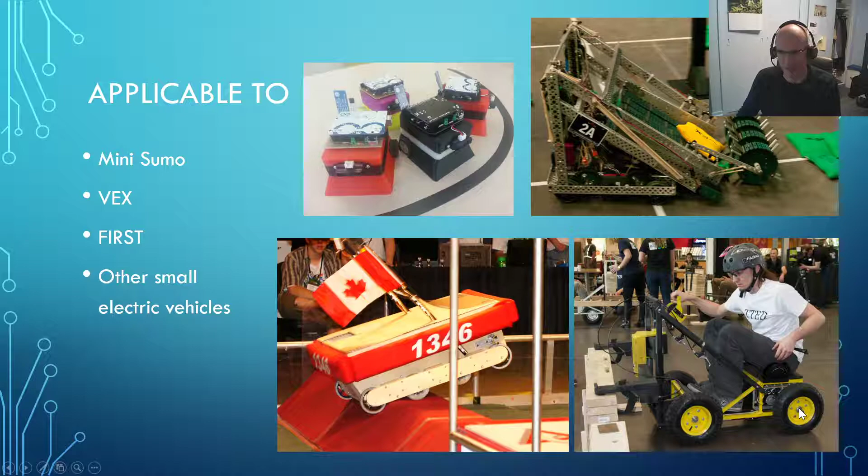In the process here in particular, you'll see that this is a four-wheel drive design with high traction wheels. It looks really good, but there are some real challenges when you go with four-wheel drive. So we'll talk about that as we go on through the design, because there are a few tricks that, if you haven't designed a robot drivetrain before, can end up catching you up.

So let's talk a little bit about some of the physics that goes into this. If you understand everything from first principles, then you're going to understand why some of those designs work really well and other ones have some challenges.

Here is just a simplified side view of a mini sumo robot. A lot of our robots, especially at the simple end of things, will just have two wheels contacting the ground and one motor driving each wheel. You can see we've got a design here called the BoomBot, and on each side I've got one motor, and then we've got a slidey platform up at the front.

This is what the mini sumos tend to do - because you're trying to push somebody off the ring, you want your plow to get right down underneath them. So the front of your robot will form this wedge, and you want a little bit of weight resting on the plow, but not too much, because all of your pushing power is going to be transferred through your axle down through your wheel.

We're going to talk about the coefficient of friction happening right here where the wheel meets the road - literally where the rubber meets the road. Really important in analyzing where this goes is your center of gravity, or center of mass, on your robot. You can adjust that when you design your robot by controlling the position of your wheel relative to the plow.

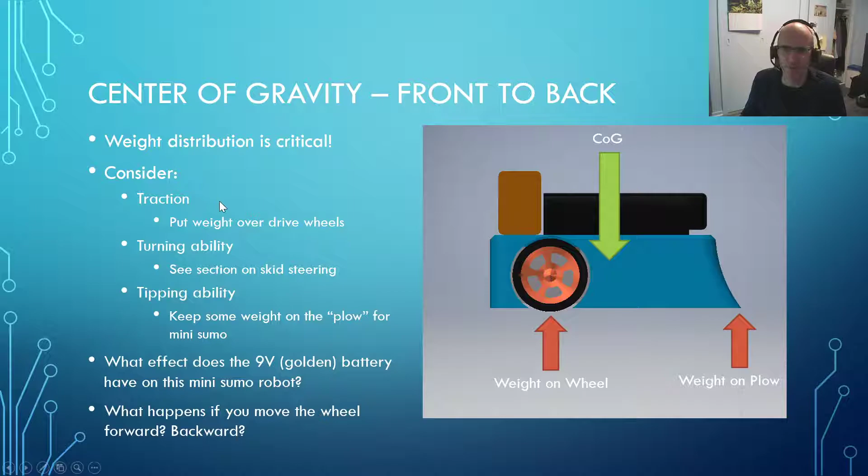Those are calculations that we did in our structures or statics class in a previous semester. So take a look at your moment calculations and how those work, because they really matter here as well.

Now, in addition to the center of gravity being forwards and backwards, as you get into bigger vehicles you also need to think about your vertical center of gravity. Although this robot's great, it's got almost all of the mass horizontally aligned right over top of the drive wheels at the back.

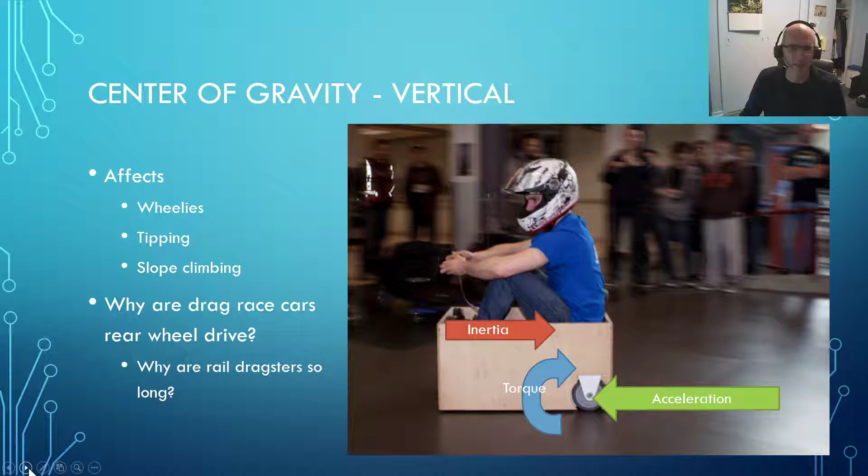Here we were able to fly out to Toronto and take part in a competition at Hershey Center in Mississauga. This would have been back about 2005, 2006, I think, and here we are in the FIRST Robotics competition.

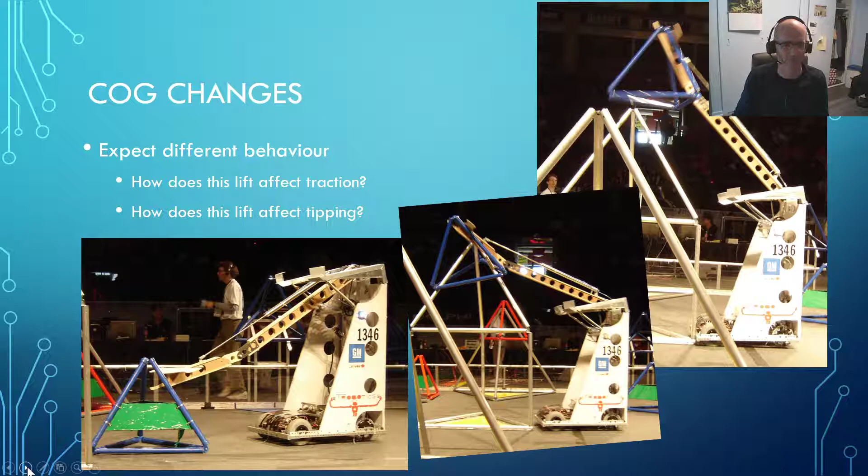So let's come back to first principles, sort of physics 11 type of things. Here we've got traction. Where does our traction come from? I'm defining traction as your pushing force—higher traction means you can push something harder. This is important if you're designing a mini sumo robot, because you want to push someone pretty hard out of there. It also affects your acceleration. If you want a high performing robot, you need a lot of traction so you can accelerate and change your speed.

Now this comes through friction of your wheel with the ground. There's what we call the normal force. Normal in this sense doesn't mean in comparison to unusual—it just means normal as in perpendicular. You could call it F perpendicular if you wanted, perpendicular to the surface you're on. In fact, it is also the force of gravity in this situation—only when you move onto a sloped incline does it stop being just gravity, and you have to get more complex in your calculations.

What happens is that your normal force interacts right down here where the rubber meets the road, where the tire meets whatever surface you're driving on. That interaction results in something we call the coefficient of friction. And just as secret engineering code, to keep people who haven't sat through boring lectures from understanding what's going on, instead of calling it the coefficient of friction, they've given it a nice little Greek symbol: mu.

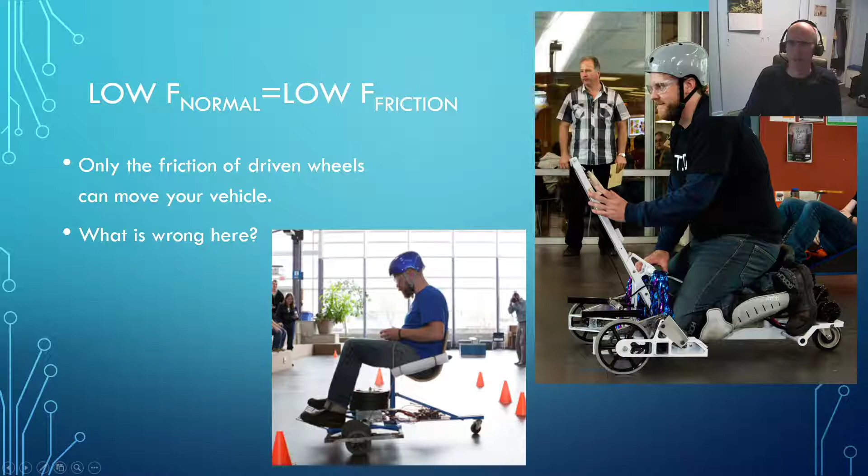This comes to one of the benefits of all-wheel drive, and a good comparison for people who've grown up in northern BC, particularly those who've had two-wheel drive pickups, is they'll appreciate the challenge of putting the mass over top of the drive wheels. In a two-wheel drive pickup in the wintertime, you'll typically throw sandbags into the back to weigh down the rear, because you want to get the mass of the vehicle over top of those wheels to increase their interaction with the snow and the ice. A better option is to go with four-wheel drive or all-wheel drive, because now all of your driving surfaces in contact with the ground are helping to propel the vehicle forward.

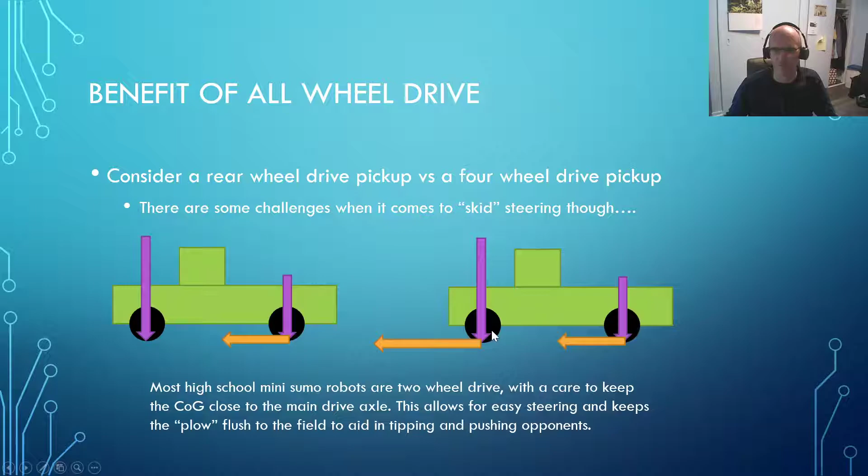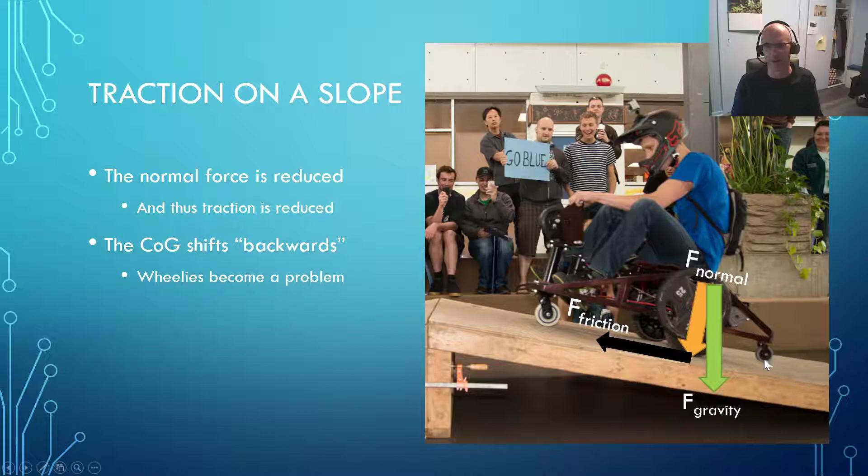They did make it up the hill, and it came out okay.

So we've got these calculations right here, and they also introduce constraints. When you know what your constraints are, then you can design within those constraints. So we've got this really simple formula: the force of friction is the coefficient of friction multiplied by our normal force.

We know that force equals mass times acceleration. F normal is based on the mass of your robot and the force of gravity. So you can make the robot heavier, you can shift where the center of gravity is, you can play with those things, but you're not going to be able to change the force of gravity at Earth's surface—because if you had that kind of power, dealing with classroom discipline probably won't be an issue for you.

Your maximum pushing force, therefore, is limited by the coefficient of friction between your tires and the road. In fact, your maximum acceleration in G-force is the coefficient of friction between your tires and the road, which is interesting, particularly when you're looking at dragsters and vehicle design. All of your acceleration is built around how well you can get that traction, the force from your drive axle down onto the road.

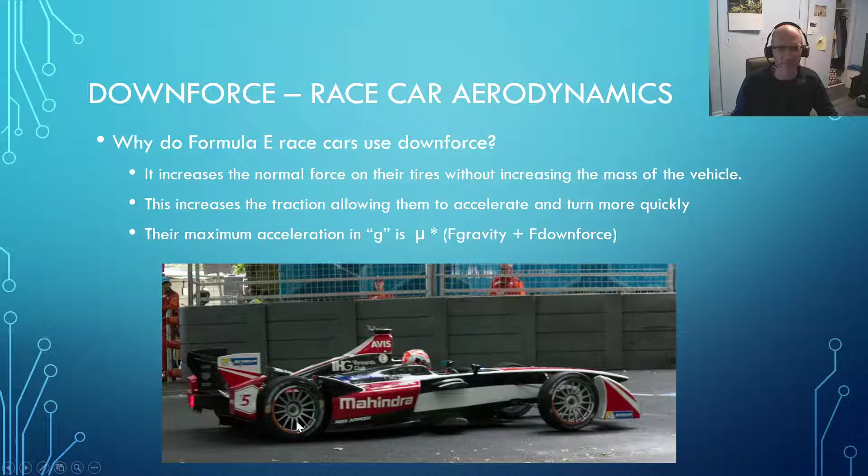In Physics 11, the physics teachers tell the students that the area of contact does not matter when calculating friction. Now, clearly, if that were true, these race cars would have much smaller wheels on them—because why not? They'd be smaller, lighter, and more aerodynamic.

We know race cars have big wheels, so people say their physics teacher told them that surface area doesn't matter. The only thing that matters for friction is normal force and coefficient of friction, and that tells you what your frictional force can be. Okay, it's a good model.

But there's various things going on at the micro level of interaction between the tire and the road. First of all, the road is not perfectly smooth. You've got little deviations in there, so your tire can press down into those deviations depending on how soft or sticky the tire is.

The other thing that happens is as the tire starts to accelerate or go through corners, you get shearing forces. If the tire was very small, all of the force of cornering would have to come up through a very small area of the tire, and you might start to shear off some of the rubber.

You can see that happen on race cars when they literally lay rubber on the road — that means they've exceeded the shearing force of the rubber. By having more rubber on the road, there's more surface area to apply that force across, so you're less likely to skid out and burn rubber, and more likely to follow the path you want or accelerate.

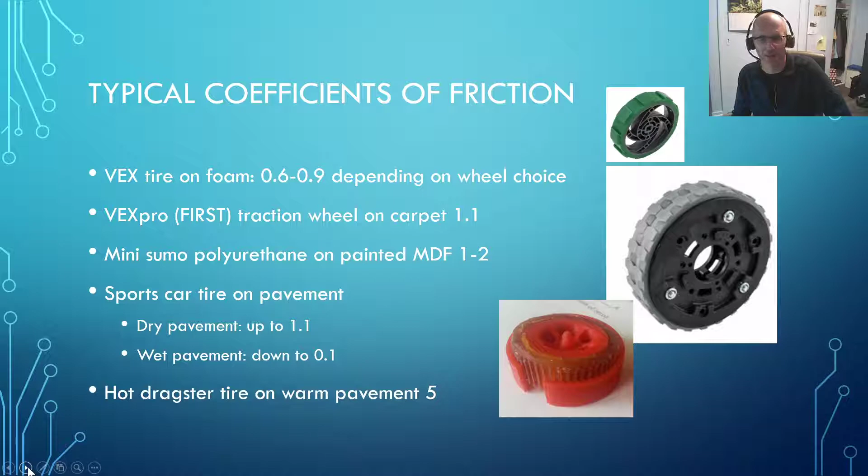So we come in here and say, well, 500 grams, that's 5 newtons in Earth's gravitational field. We've got 80% of that mass over top of the rear wheels, and you can tell that by putting one scale under the plow and one scale under the wheels — one should read 400 grams and one should read 100 grams. So you've got 5 newtons, 80% of it over the rear wheels, the drive wheels.

That's 4 newtons of normal force acting on the tire, and with those 4 newtons pressing down, a coefficient of friction of 0.9 means you should be able to push that robot forward with 3.6 newtons of force. So if you were in a pushing battle with somebody whose robot had 85% of its weight on the drive wheels...

They would have a higher normal force. And if they had the same wheels on the same surface with the same coefficient of friction, they should be able to push you backwards because they would have more than 3.6 newtons of pushing force.

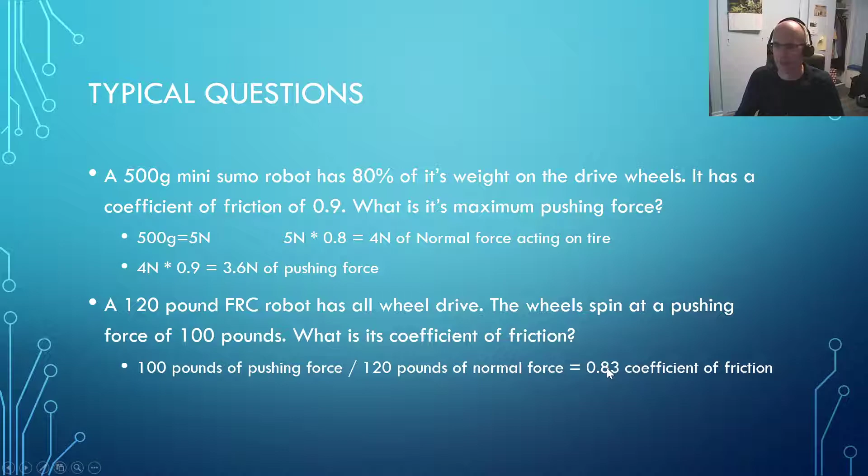You say, well, I've got 100 pounds of pushing, or in this case pulling, force. That gives us 100 pounds versus 120 pounds of normal force. So we've got a 0.83 coefficient of friction before those wheels start to spin.

Now, when you're pushing or pulling, friction is really good. When you're accelerating, friction is great — that's what you want. But we said we're going to talk about some of the problems with four-wheel drive designs, and this is one that in our first year of FIRST Robotics came back and caught us really well.

I understood the physics, but I'd never built a robot that size before. I'll tell you a little bit more about that. We solved the problem with some help from other teams, but we weren't able to turn because we did a four-wheel drive skid steer robot.

If you've got really good forwards and backwards traction, that's great. But if you've got really good side-to-side traction, you're going to be stuck, because your forwards and backwards traction trying to turn the robot this way will be fighting against your resistance to the lateral forces.

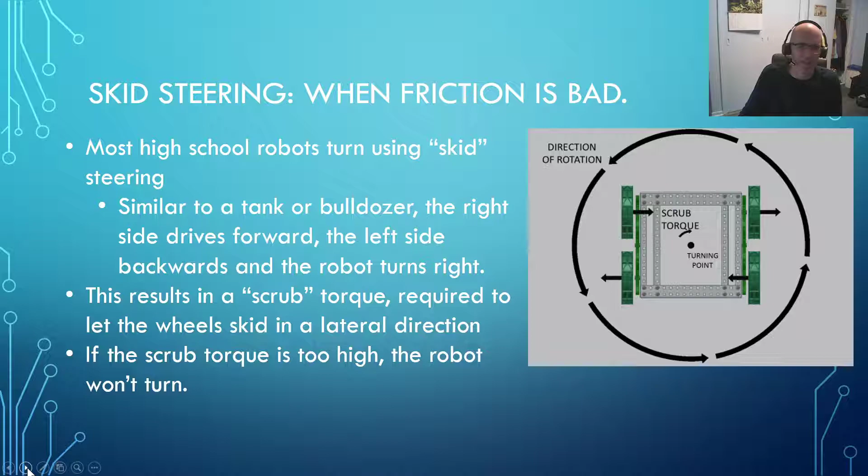So we'll take a look at some of the things you can put into your design to overcome that, because as we learned over the years, those problems got solved.

Here are some skid steer solutions we've used in a number of different places. With our tethered robots, we'll completely ignore the problem: we'll have two drive wheels, and then just a contact patch here with a very low coefficient of friction because it's just a little slider that fits right in there. So it's got no forwards and back, minimal forwards and backwards, and minimal side to side friction - that's going to slide very nicely from side to side.

Right in here, we've got the boom bot - my head's kind of sitting over top of the wheels here, but we're also going to make a boom bot. Down here, we've got our line following sensors, and again, they are going to be in a low friction skid platform. That's only there to keep the robot from tipping over forwards and backwards and to follow the lines. It's got very little interference with turning side to side, so very little scrub torque.

Here's a vehicle that we made for the Vehicle in a Box contest, and you can see it's got casters on here. So when this wheel turns forward and the one on that side turns backwards, it generates a turning torque right here, and the casters will turn and allow the front of the robot to skid.

Yeah, that works as well. Casters are probably the most inexpensive option to solving this problem. Putting a skid surface down here wouldn't work that well, we'd scratch up the floor something horrifically. So we needed something wheeled to solve the problem, and casters are readily available, either from a place like Casterland or from recycling old office chairs or furniture.

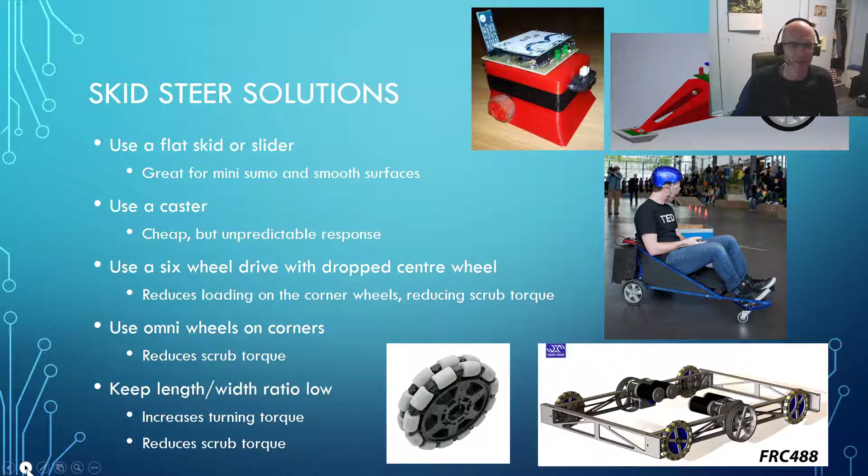Now, getting back to some calculations, we're going to take a look at the moment about the drive axle. What do I mean by that? Everything in your robot is going to be controlled by spinning an axle. So the torque about the drive axle is simply the force acting at the edge of the tire multiplied by the radius of the tire.

So this torque right in here in purple, or the moment if you prefer, is going to be 5 newtons multiplied by 15 millimeters, or 75 newton millimeters. Keep in mind newton millimeters, you'll sometimes see that represented as millinewton meters. Doesn't really matter where you put the milli. Either way, it comes out to 0.075 newton meters because milli is 3 decimal places. So 1 decimal place, 2 decimal places, 3 decimal places. There's our 75 millinewton meters, the same as 0.075 newton meters.

Excuse me, I hope I managed to get mute turned on before.

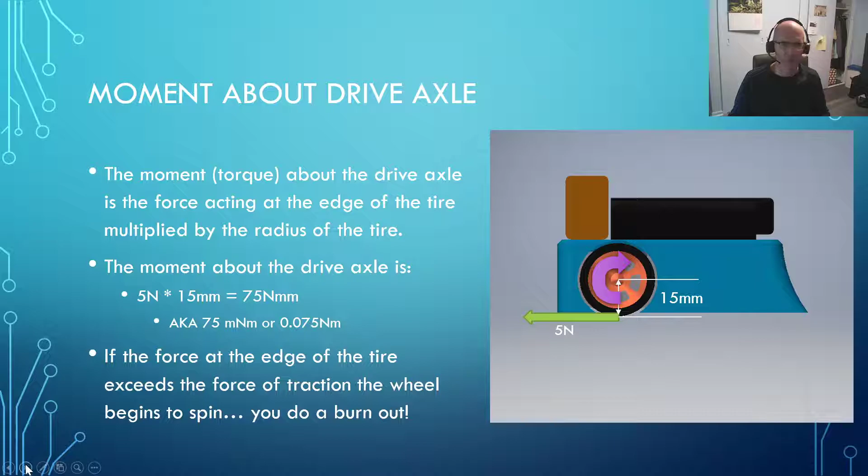Okay, now if the force at the edge of this wheel exceeds the force of traction, the wheel begins to spin and you do a burnout. Generally, we're going to come up with two situations here. One is where the wheel breaks free and you do a burnout. The other is where the coefficient of friction is high enough that you don't have enough torque in your axle coming from your motors, and you end up stalling the motors. So we can either stall or spin depending on the amount of torque we're getting from our motor and gearbox. We're going to take a look at how to optimize that in a bit.

Now, your tire or wheel diameter really matters here. As you increase the wheel diameter, you increase this lever arm, and that increases the amount of torque required to turn this wheel. So with a small diameter wheel, or small radius, we're using the radius as the lever arm. 5 newtons at this point of pushing force, times 15, gave us 75 millinewton meters.

But if we go with a larger diameter wheel, with a 30 millimeter radius, that's going to require 150 Newton millimeters to turn this wheel to get 5 newtons down here. So if these two robots are in a pushing battle, this one is only going to need half of the force, coming from half of the torque at the axle from the motors and gearbox.

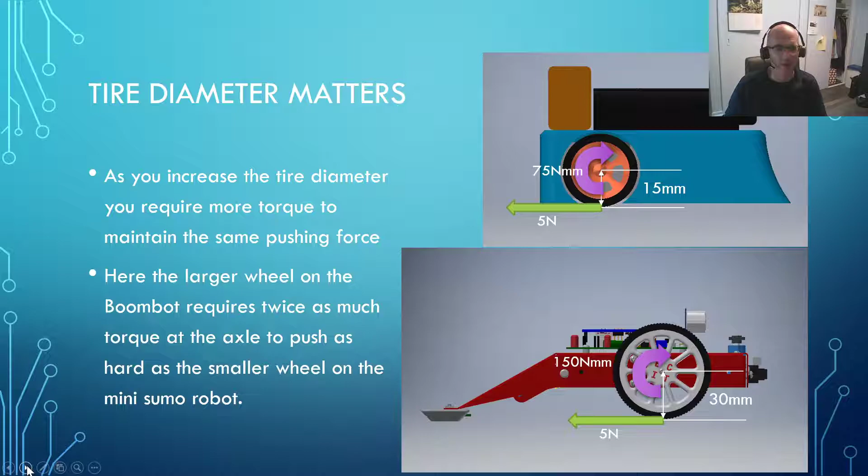The advantage of the larger wheel is that when this axle and this axle spin at the same RPM, this robot will travel twice as fast. If this robot's spinning at 100 RPM, you've got 100 circumferences of this wheel every minute. With this one spinning at 100 RPM, you'd only have 100 circumferences of this wheel every minute, and this wheel has half the circumference because it's got half the radius. So your wheel diameter really does make a difference.

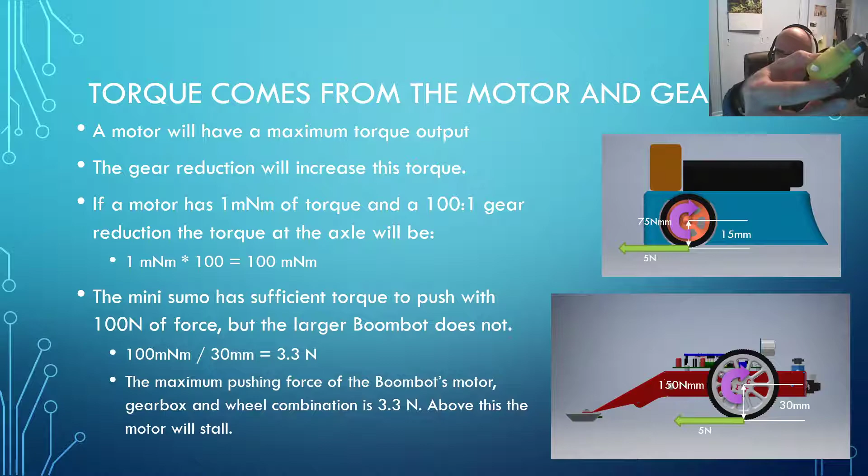Now, our torque to spin that wheel has to come from somewhere - it comes from our motors and our gears. We've got a video where we talk about motors and their maximum output torque. Generally what we want to do is take a small motor like this one, and run it through this yellow gearbox to increase the amount of torque and drop the RPM so that we can spin a larger diameter wheel. Because if we just hooked this wheel directly up to the motor, the motor wouldn't have enough torque to turn the wheel, and it would just sit there continuously stalled.

So, for instance, if a motor has 1 millinewton meter of torque and a 100 to 1 gear reduction, then the torque at the axle would be 1 millinewton meter times the 100-fold gear reduction, which gives us 100 millinewton meters at the axle. Now that would be enough to turn this wheel, because we calculated that this wheel, to get 5 newtons of pushing force, would only need 75 Newton millimeters. This one would require 150 Newton millimeters.

So this particular gearbox with a 1 millinewton meter motor and a 100 to 1 reduction would be able to make this robot push with 5 newtons of force, but would not be able to make this robot push with 5 newtons of force. On the other hand, this robot down here would move faster, because your RPM is also being reduced 100 to 1 - that's where you're getting the extra torque from.

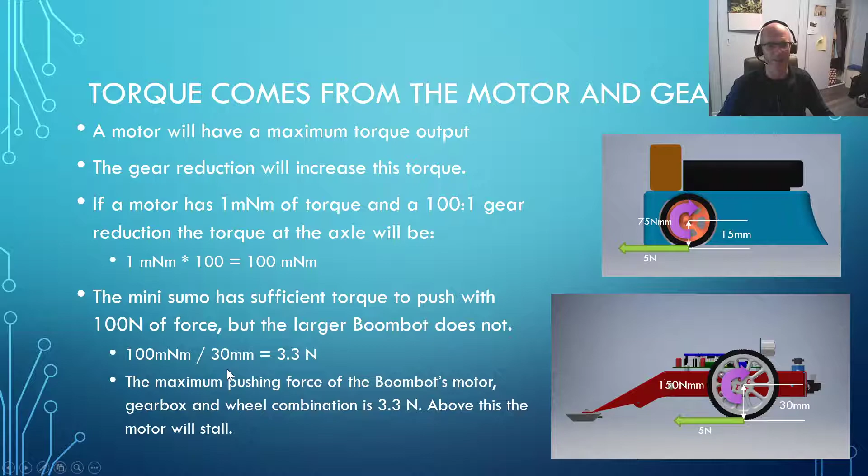Now, when we look at it from the side and do all our calculations coming from one side, we forget sometimes that there's two motors acting here. So really we can divide by 2, or multiply the motor force by 2, to do the overall calculations.

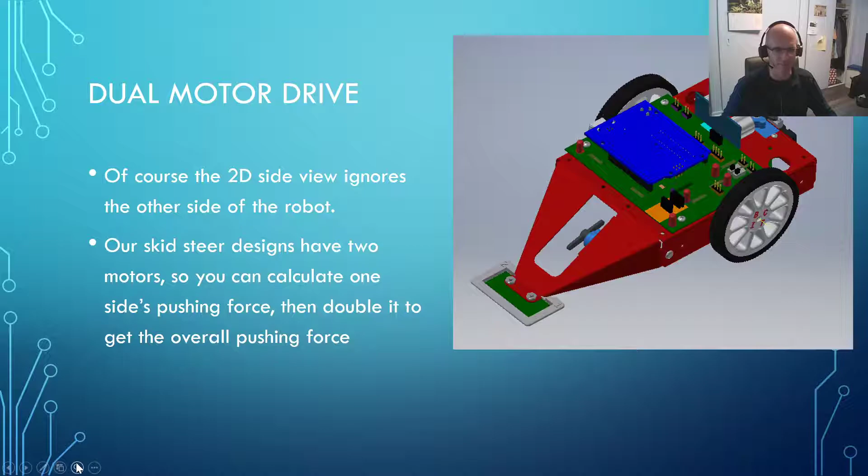So here's an example of a typical question you'd find if you're trying to design a robot. I'm going to use an FRC robot, but this applies to putting an electric drivetrain underneath a La-Z-Boy chair - because why not? If you want to do hallway patrol or run something down to the office, why not put a little robot like this underneath the chair and have it scoot you down to the office? This applies if you're making mini sumo robots, something mid-range like the Boombot, or designing VEX robots. This is an FRC robot, but the calculations are common to all of them - you just sub in different motors, different gear reductions, and different wheel diameters.

The math is all the same. So we're using 2 CIM motors on each side. On this robot, we've got 2 motors driving a gearbox right here and 2 motors driving a gearbox right over here. Each gearbox has a 14 to 1 gear reduction.

The CIM motor has a stall torque of 2.42 Newton meters. In other words, when you apply 12 volts to that motor, it's going to turn the motor shaft with a maximum of 2.42 Newton meters of torque.

You've got an all-wheel drive drivetrain right here, so the entire mass of the robot is coming into the ground, and you have 15 centimeter diameter wheels. What's the maximum pushing force that your motors can achieve? How hard can you push?

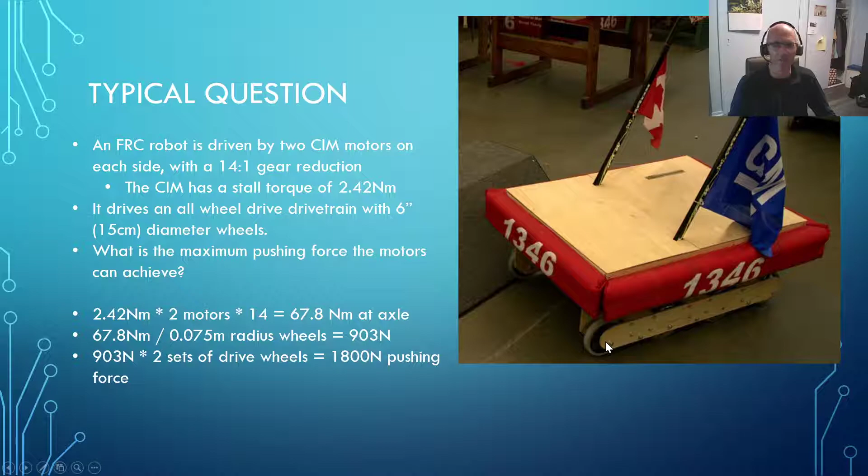You could change that gear reduction. So if this is way too much force, you could go to a lower gear reduction and maybe get a robot that moves faster. Or you could go to a larger diameter wheel and get a robot that can't push quite as hard but moves a little bit faster.

So then we'll hit that with a follow-up question and say, if the robot has a mass of 60 kilograms and a coefficient of friction of 1.1 between the wheels and the playing field, do the wheels spin or does the motor stall when you're turning that motor at maximum torque? Okay, so what we can do is we can say, well, 60 kilograms times 10 newtons per kilogram means that the entire mass of the robot has a normal force of 600 newtons.

Our 600 newtons normal force multiplied by the coefficient of friction of 1.1 results in an absolute maximum pushing force of 660 newtons. Well, we just did a calculation saying that our motors could achieve a pushing force of 1,800 newtons. But when that goes down through the wheels, our traction limit is 660 newtons.

So what's going to happen under this situation is that your wheels will spin, break free, and sit there and burn rubber before those motors stall.

So really, you could make this machine a little faster. You could make bigger wheels. You could go to lower gear reduction. But as you'll see when we take a look at the motor power curve, sometimes that's a really nice way to have it because that means that during normal driving operations, your motors are operating in a more efficient RPM range.

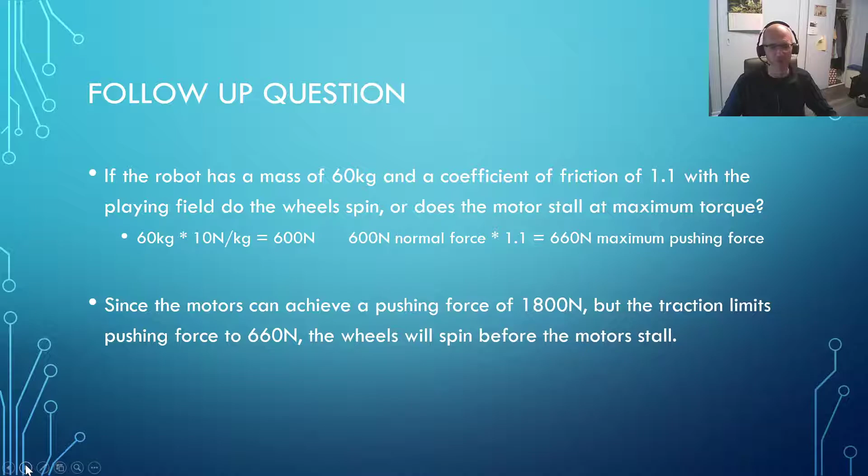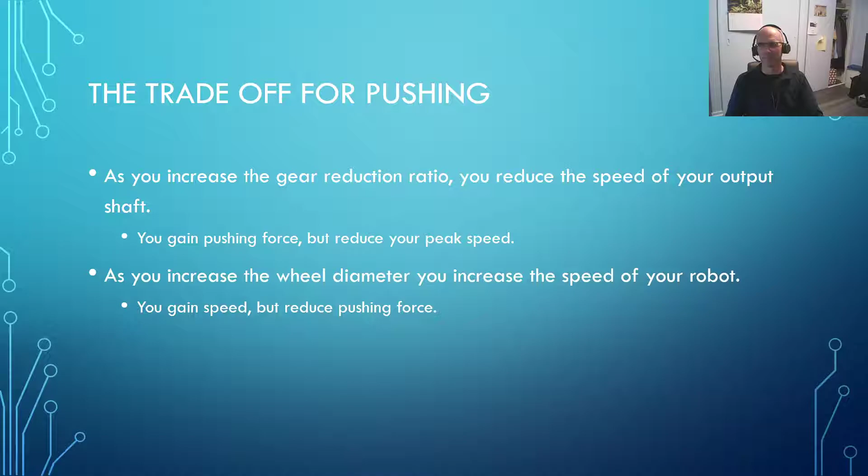So as you want to get more pushing force out of your robot, and as you increase that gear reduction ratio, you reduce the speed of your output shaft. It lets you turn that output shaft harder, but you reduce your peak speed. Now the trade-off at the other end is as you increase your wheel diameter, you increase the speed of your robot, gaining speed but reducing the maximum pushing force that your motors can generate.

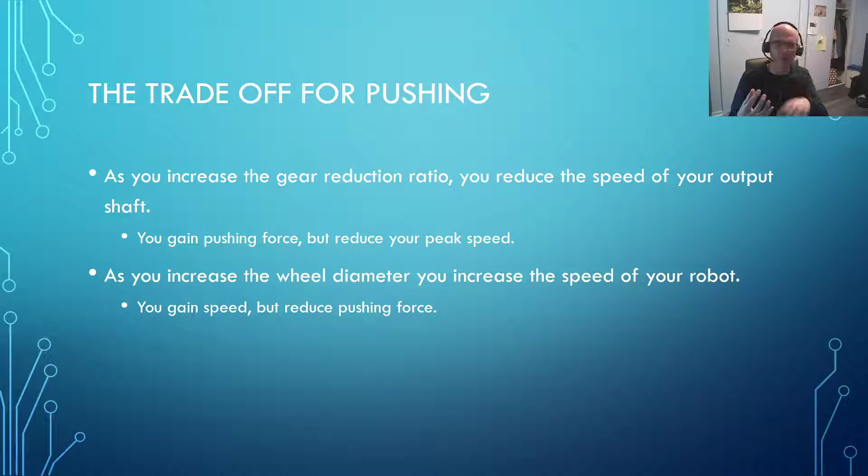So when you're designing your robot, you're going to have to do some calculations and figure out how big a wheel do you want, and based on the size of the wheel and how hard you want that robot to be able to push, you need to then take that back and figure out your gear ratios based on the performance characteristics of your motor.

So here's one to take a look at your Tethered Mini Sumo robots, because this affects your speed calculations as well. Your Tethered Mini Sumo robot achieves a maximum motor power output at a speed of 6,113 RPM. And again, there's another presentation that looks at motor power curves that will talk about that.

Typically, we might have a 1-inch, 25-millimeter diameter wheel on a Tethered Mini Sumo robot, and one of the gear reduction options you can build into a Tamiya gearbox is 114.7 to 1. There's a handout called Mini Sumo Design Tips that discusses different gear ratios and suggests wheel diameters to try, walking you through these calculations step by step.

So what is the peak velocity of your robot going to be under this setting? If you're achieving peak velocity at peak power, you take your 6,113 RPM - that's your little motor spinning at about 6,000 RPM - and divide that by 114.7, your gear reduction ratio. That means your axle shaft should be turning at 53.3 RPM.

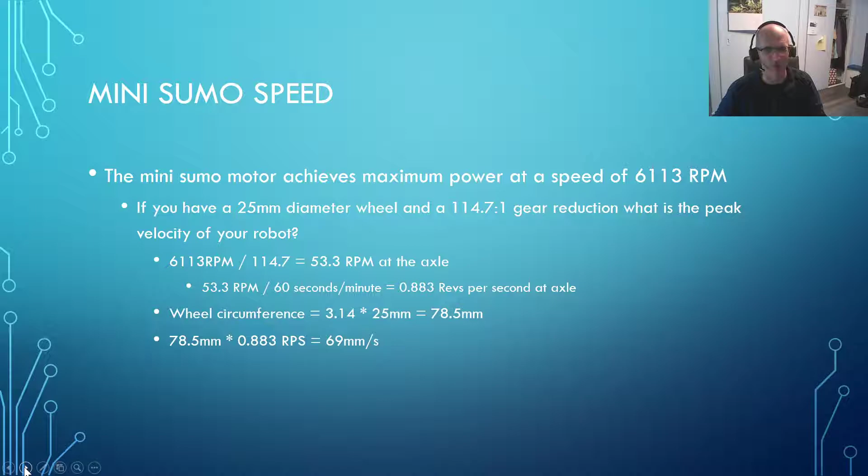For a tethered mini sumo, that's just about right. As I say in the handout on tethered mini sumo design tips, sometimes you can actually build one that moves too fast and is difficult to control, let alone not having much pushing power. You do need to be able to control these robots, and sometimes one of the reasons we gear the motors down is just to make them more controllable.

Now, this is applicable to robots, and we're discussing it in the context of mini sumo robots - these little things you can hold in your hand. But really they apply anywhere you're using any kind of motor to build any kind of vehicle. One of the first projects I did when I started teaching high school, fresh out of BCIT, was we made Electrathon race cars.

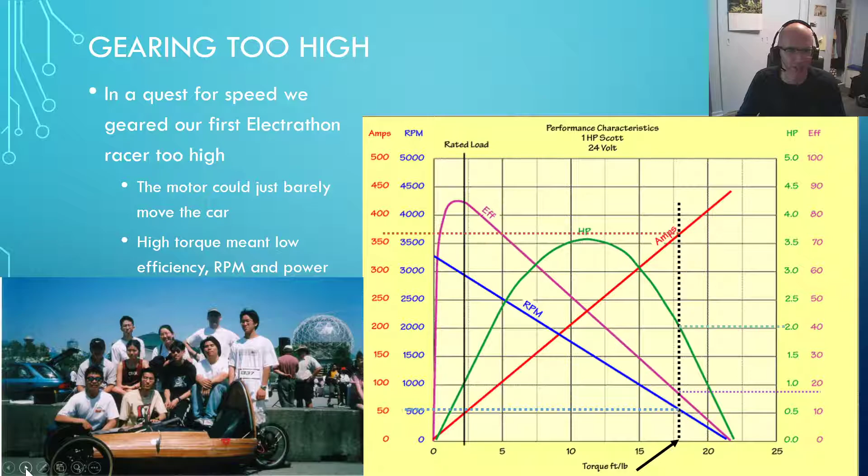Although this wasn't the fastest Electrathon car on the track, it was top 2 or top 3 in BC that year. It was definitely the most maneuverable, and if there'd been a slalom competition, I'm pretty sure this one would have ended up winning.

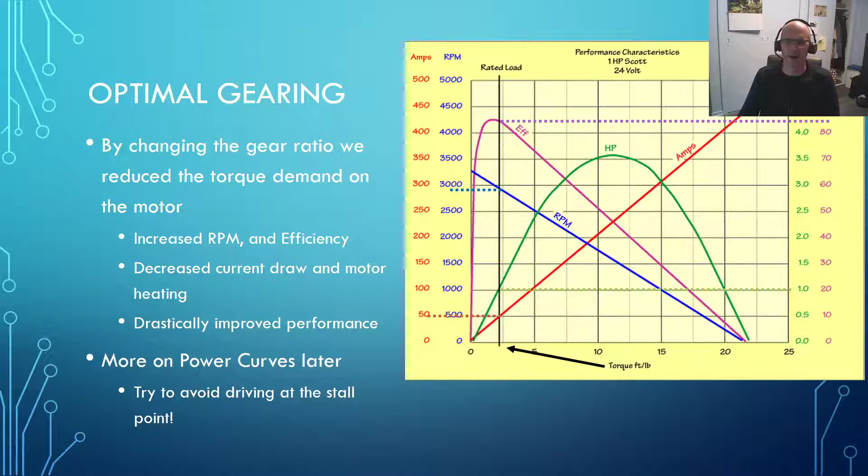When we were working with that, we had to play around with our gearing to try to get it optimal, and we ended up doing lots of test runs. We used the power curve to figure this out because we wanted to run our robot close to our peak efficiency range. That involved working with the drive wheel diameter and pulley ratios, which were our equivalent of a gearbox on this system, to make it all come together well. We'll talk more about power curves later.

So what gearboxes do we have available for making a tethered mini sumo robot? There's these little yellow gearboxes that have become an option in recent years. You'll sometimes see them called a toy car gearbox or a TT gearbox. You can find them online from a number of different vendors, and you'll require two of those. They're a couple of dollars a piece. The downside, or upside depending how you look at it, is you don't actually assemble them—they come pre-assembled.

The gearboxes I've been using for decades with my students are the Tamiya twin gearboxes, available from a number of online vendors. My suggestion for buying them in Canada is the same place I've bought them in bulk for years: Borgfeldt, BORGFELDT.ca. You actually have to phone them to get the best deal. They do have an online site, but you order them 50 per box for your class, and you'll get a way better rate than anywhere else I've found. What's neat about the Tamiya gearboxes is they come in pieces, and your students assemble them themselves, choosing their gear ratios.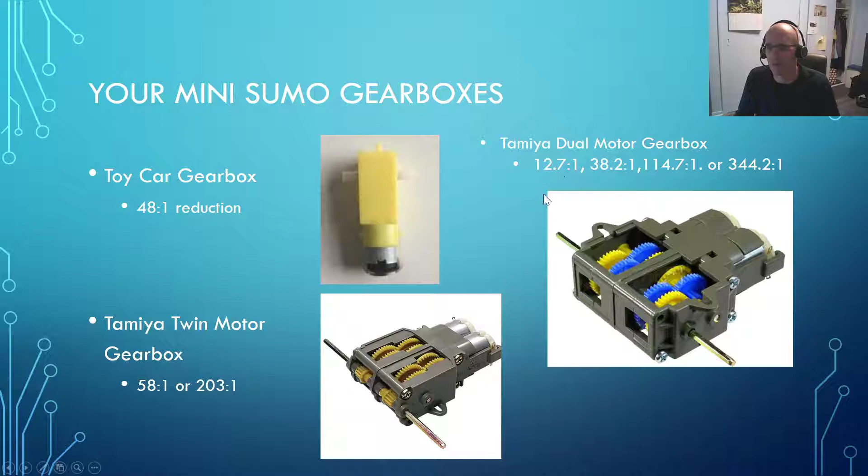Somebody with a faster robot will get in behind you and attack your weak spots. So we've got a few different choices—if you had to choose just one for your classes, this Tamiya works pretty good, or choose this one, just don't build the 12.7 to 1, since it doesn't work well for our applications. The nice thing is we know the performance characteristics of the motors, and what's interesting is you can actually swap out the motors—there are motors of similar size but with different windings that have different performance characteristics.

If you hunt around either on the TT gearboxes or on the Tamiya gearboxes, intrepid minds can actually supercharge their machine by upgrading the motors to better match the batteries that we've got. I'm not going to tell you any more about that aside from saying it is possible. I've had students go out and do it, and I've smiled and nodded because I've known what they've done. We haven't mentioned anything to the other students until it was all over and done with, and it was like, hey, they went out and did the research. I didn't say you couldn't use a different motor. So if I don't say you can't use a different motor, doing your research and figuring it out is probably a really good idea.

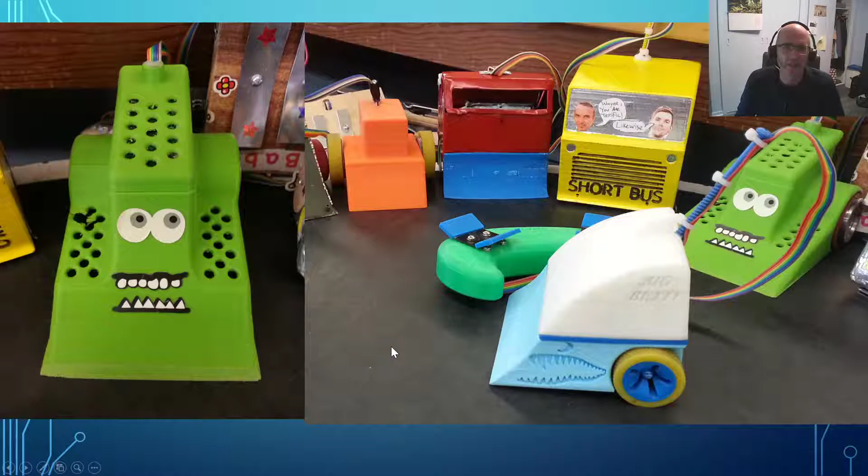Now, I've shown you a bunch of metal robots—that was how I built them with my students. I did this in a robotics and flight grade 9 and 10 introductory tech class. Students do their little rotation through the grade 8 classes here in BC, get a taste for it, and maybe they come back and do the class with me.

I was teaching in Vancouver, so selling a course as metalwork wasn't a big sale to a lot of parents, but selling it as robotics and flight was, and the kids could sign up for a shop class. It also brought a different part of the school down into the shop classes, because hey, I'm coming down for robotics and flight, and Mr. Brett's going to talk about some of the physics that go into designing the robot—friction, gear ratios, batteries, and current. It became a really general tech course.

And in the whole process, I ended up using it as an example to teach sheet metal work. I had the students turn wheels on the lathe, and we covered a lot of classic metalworking skills that you do with a grade 9 or 10 student.

We drilled and tapped set screws to hold our aluminum wheels onto the axle shaft, and I was really pleased with how I was selling grade 9 metalwork as a robotics course. But maybe you're teaching drafting, or maybe you don't have sheet metal tools in your shop, or maybe you're just interested in doing this project. You can do it in any shop. You could make these out of wood if you wanted.

But if you're doing it in a CAD lab, why not 3D print your designs? These are some of the 3D printed designs that students have developed. You can see that they got into Inventor or Fusion 360 or whatever CAD program they wanted to use, and ended up coming up with some really nice designs that they kicked out on the 3D printers.

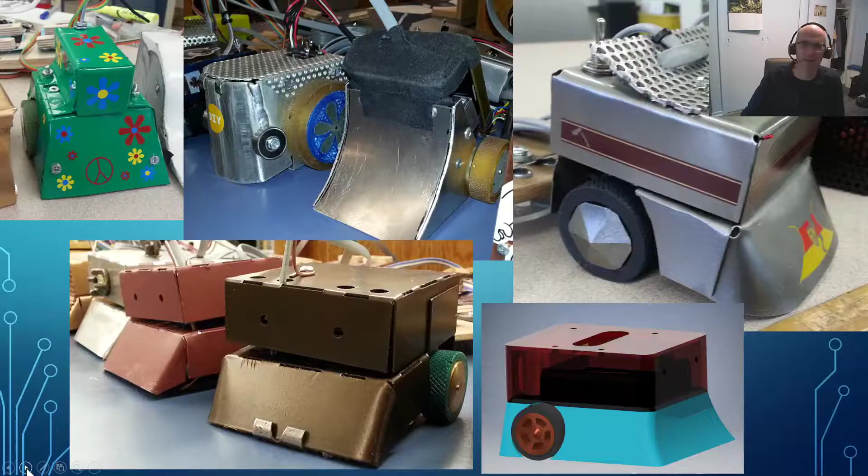What's really neat about doing it that way is, of course, you can download the models for the Tamiya gearbox and for the battery pack, so you can actually use them in your virtual world inside your computer to make sure that you're not getting any intersections with things, or building things that can't be done. You can actually have a really nice working model all set up and ready to go.

Here we go. We've got some graphics on there. I always love a peace symbol. We use the vinyl cutter on here, and the student decorated that up nicely, or maybe they just bought some stickers. A little bit of extra weight on here.

Not quite sure whether the bearing was intended with evil intent to help push people out of the ring, but you'll notice this one has a really large diameter wheel on it. So that means the gearbox probably has really large gear reduction. The other thing you run into when you've got really large diameter wheels is that you have to move the axle shaft forward from the rear wall of the robot simply so that you can fit the wheel into your 10 centimeter by 10 centimeter allocation.

Here's another one, medium-sized wheel. This person chose to go with a hexagonal wheel, but they kind of - or maybe octagonal - flattened the corners down a little bit here. Tire smoothed everything out nicely, and it worked pretty good.

And a couple examples of sheet metal design right in here. Not the nicest job of folding I've ever seen.

And here's a CAD model coming together showing that the battery pack is going to fit inside the box. In fact, you can design it in CAD, and if you're using Inventor Fusion 360, they have sheet metal tools. You don't necessarily need to design the entire thing in to be 3D printed because you can use sheet metal as well.